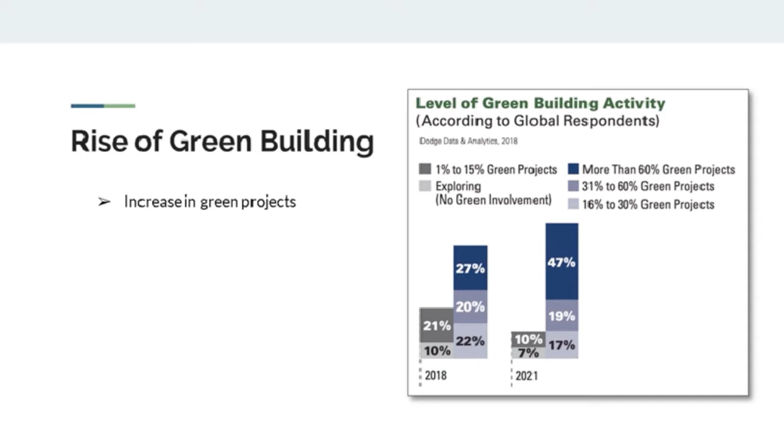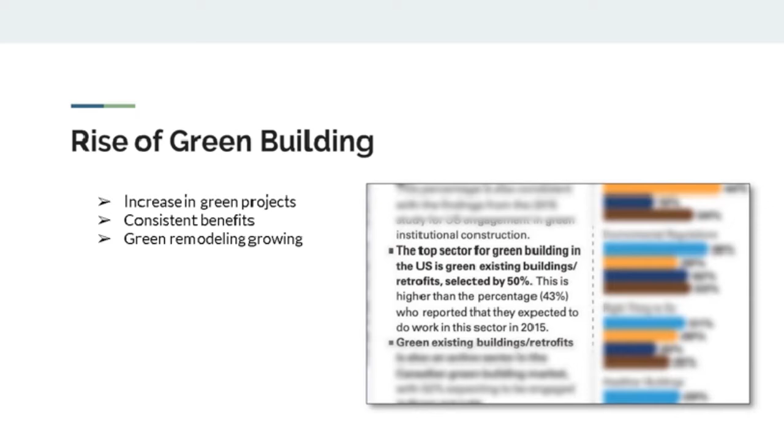The increase isn't totally surprising, considering the reported ROI on those same projects, including retrofits, which in 2018 increased asset value by an average of 5%. So let's say we're in Chicago, where the median home price is about $242,000, about $20,000 more than the national median. A green retrofit might increase that value upwards of about $12,000. And in fact, green retrofits and projects on existing buildings are the top sector for green building in North America.

And I talk about green and sustainable building not only because companies are doing it, but because what's driving this trend is homeowners, both in the U.S. and in Canada. Client demand in this study was the top trigger for green building. So it's not only good for the environment, it's something that people actually want. So you're not just doing it for the sake of making a statement.

Now, I bring this up because a lot of companies are working this innovation, sustainability, and efficiency into their businesses. And I wanted to talk to you three, Josh Anderson, Josh Moser, and Phil Keene, about how you're working it into your businesses before we get into the specifics of the New American Remodel. So Josh Anderson, if you want to kick us off, tell us a little bit about how Element works these fundamentals into your business.

I think for us, this is something that we decided years ago that it was who we are. And so for us, this is kind of one of the core tenets of who we are as a design-build firm and as a contractor, that we really want to be building and working on projects where we're creating the very best product that we can. And for us, before it became as mainstream as it's becoming, high performance and designing for high efficiency was a core value of ours. And so that's just part of what we do.

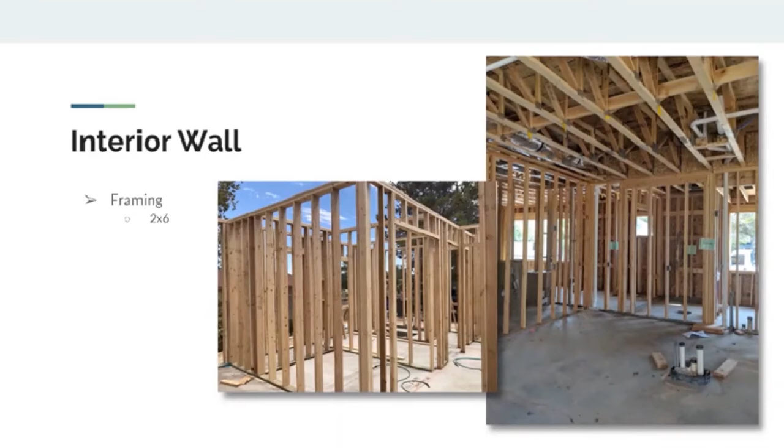So what's actually built is a 2x6 wood frame exterior wall. We have 2 inches of rigid foam, and then open cell spray foam. And part of learning what performs has a lot to do with your individual climate and where you're building around the country. But for us in the desert, the exterior rigid foam has a huge impact.

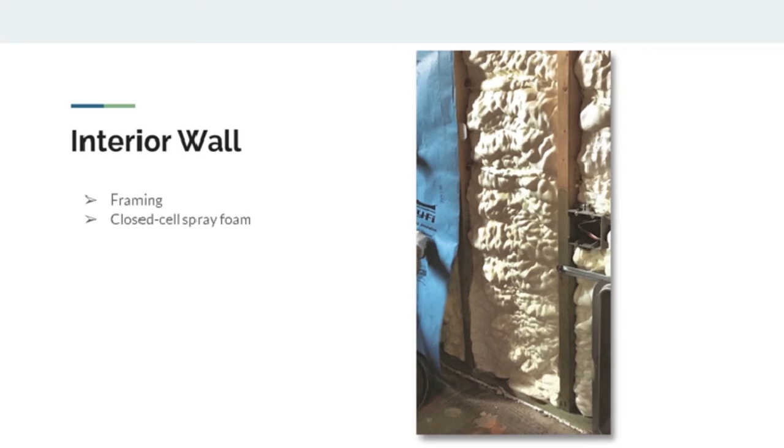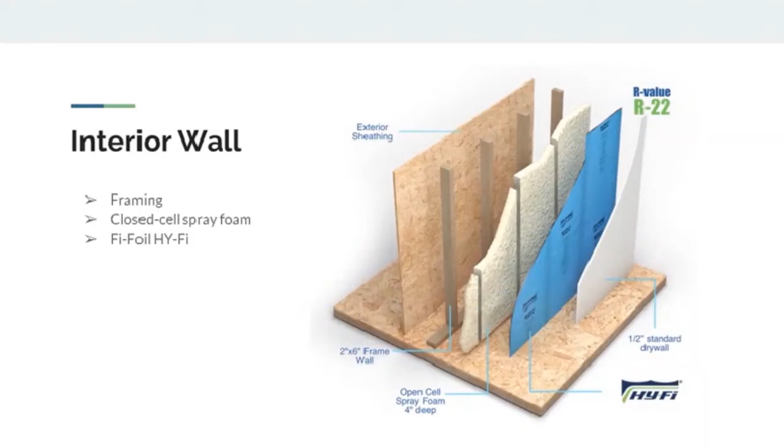It prevents thermal bridging. So if you were to take thermal imaging of a wall that did not have rigid foam on the exterior, you're going to see heat transfer occurring at every one of your vertical frame members. And when you take a thermal image of that exact same wall, but with rigid foam on the exterior, it prevents the thermal bridging, so you don't have the heat gain that you get going through the frame members.

For us, that's become probably our standard wall assembly, or our default. And so we end up with a great insulation value. The spray foam does a great job in terms of sealing off any of our air penetrations. And we'll do some form of sill plate seal, and then the rigid foam on the exterior, spray foam on the interior.

I actually can't remember offhand what our air exchange on this home was, but on our homes, we're consistently below 1.6, 1.5 on our air exchanges, and typically that's on homes that are 10,000 square feet and larger, which is phenomenal if you've tested any homes. So for us, this is a very, very effective system in terms of building envelope.

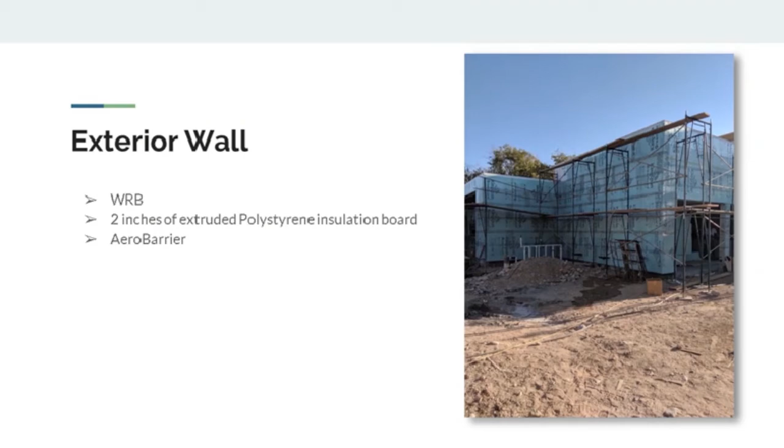So the air changes per hour for this year's house, I believe the final test was about 1.54, which is very impressive. Last year's was 2.5, which even 2.5 isn't a bad number. It was an impressively efficient house last year. And we spoke with Drew Smith, who a lot of our listeners will know from Two Trails. He's also done a lot of efficiency consulting on all the houses. He was discussing that even a decade ago, houses were getting in the 4s and the 5s. So it's pretty impressive to see what you guys are able to accomplish.

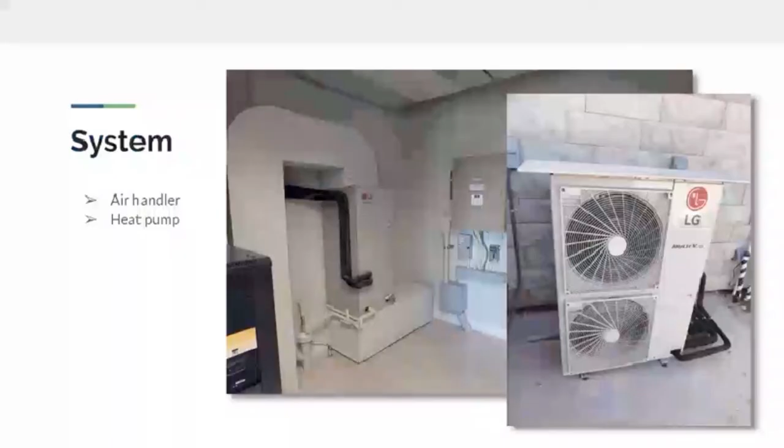And he also mentioned the AeroBarrier was a big help in terms of getting that in. So you sort of reiterated what you were saying, Josh. The next thing I want to talk about in the home, where you're able to gain a lot of efficiency, is the HVAC system. Josh Anderson, it was kind of a complicated system that this year's house used. Why don't you walk us through it, starting with the heat pumps and the air handler.

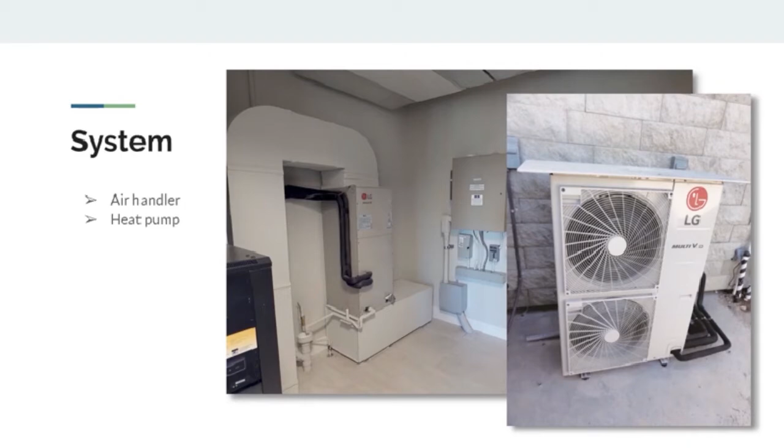So this year's home, we used LG mini splits. So we have ducted mini splits throughout the house. We were trying to showcase all of their products. So in one of the rooms, it's a wall hung unit that looks like a piece of art. We have ducted mini splits, and then just some mini splits.

For us, we love this system because it's incredibly efficient in that you are only heating or cooling the spaces that you're using, and you have the flexibility to really, truly set the comfort level in each space within your home. So they're extremely efficient in and of themselves, but then on top of that, the added efficiency of individual space control means that you're not heating and cooling the spaces that you're not spending time in.

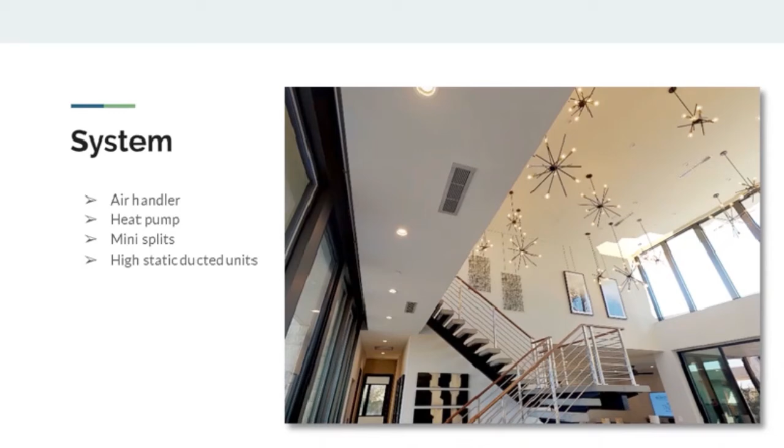And then the heat pumps, because of our solar array, we're generating enough power to offset basically the consumption of the whole home. And so from that standpoint, heat pumps are good as well. And we're in the desert, so we don't have the frigid cold temperatures that some parts of the country have.

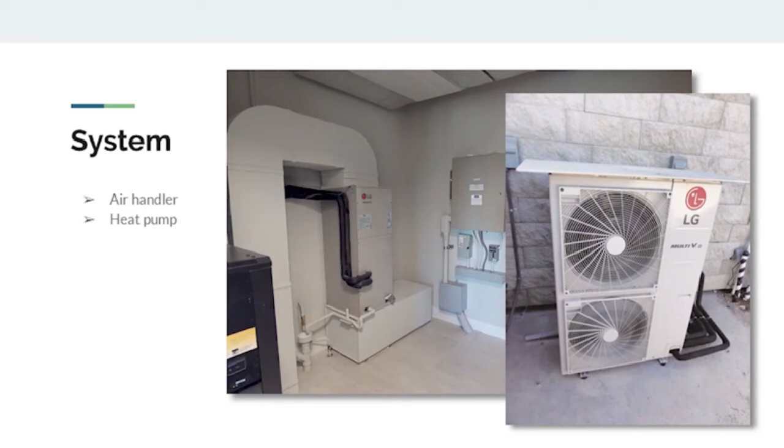So, were there any challenges in installing this HVAC system? Yeah. So as anyone who has done modern architecture, modern construction can attest to, the challenge is always getting all of your rough-in into the lid cavities that are typically reduced in this style of architecture, and so this was no different. We had some challenges in the secondary bedrooms.

The cassette and return airs are rather large, and getting those into the lid took a little creativity on all of the team's part, but it turned out beautifully, and we're thrilled because of the efficiency of the system and what that does for us in terms of our performance and comfort of the home.

Question for Josh Moser. Obviously, in this home, you had LG's sort of decorated mini split system that serves as basically a piece of art while also working as a mini split. But not all mini splits have such a nice little design component to them. Mostly they're functional. What are some of the challenges in terms of fitting those into a room, and how do you usually, because I'm assuming you install mini splits on other projects, work mini splits into a room without them looking too obvious?

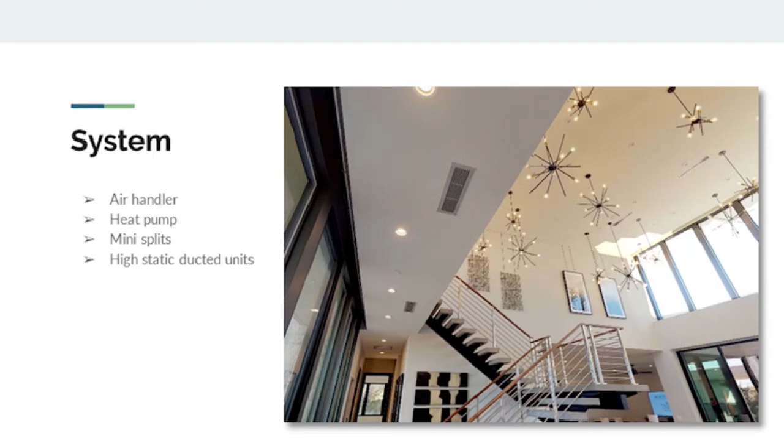Well, generally trying to make them as invisible as possible is usually the goal, but it was nice to be able to have exposure to LG's new system that is definitely more aesthetically pleasing, and to have the flexibility of being able to put whatever kind of portrait or picture you would like in that system. I love the flexibility of it.

I learned shortly after we had installed it, because the system does kind of protrude out of the wall quite a bit, because it is an HVAC system, that it is possible to actually semi-recess this system, kind of like how you do a recessed TV. You can actually build out a recess for this to sit more into the wall, as long as it has, I think they said, a 6-inch clearance around it. So that was my only holdup with the system. Otherwise, it is a great solution for this kind of application.

Excellent. Moving on to another part of the home that obviously has a lot to boast about is the energy portion. Now, it's my understanding that the house generally has a pretty normal energy setup, apart from something that Josh Anderson mentioned earlier, which is the solar array that sits on the top of the roof. Josh Anderson, you want to tell us a little bit about that array and the efficiency it brings and what the challenges of installing it and working around it are?

As far as the efficiency goes, it's an efficient system. The thing I love most about it is it's backed up by LG. So a lot of your solar manufacturers and panels, and this is particularly true going back a few years ago, are for the most part companies that don't necessarily have a market presence, where your clients know who the company is. And so from that standpoint, LG's got great brand recognition.

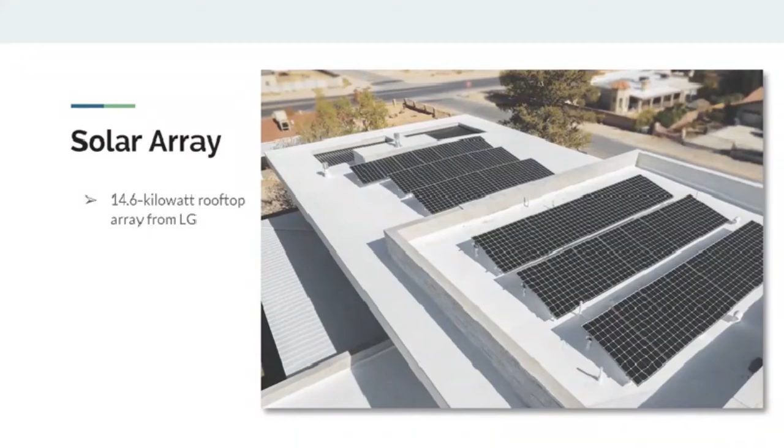And I was made aware that the solar array helped a lot in bringing down the home's HERS score. It's my understanding that without the array, I think the HERS score would have been something around 47, and then with it, brought it all the way down to -17. That's correct, right? Yeah, I believe those are the numbers.

And the HERS rating without solar, if you look at the amount of glazing in the home, it's a very, very well built home. And then of course solar is always the thing that kind of puts us over the top as far as the efficiency and HERS ratings are concerned. So in this instance, we're putting power on the grid.

It's my understanding that for net zero and having a solar array, for all of that to be affordable, it needs to be cost effective, which ends up factoring into the size of the panels, because you want the smallest, most efficient that you can without spending too much money. For determining the size of these panels, is that a calculation that you make, or how is that made before these are purchased?

We do that, or on this particular home, we do that in conjunction with Two Trails, with Drew Smith. He's our energy consultant on this home and actually our energy consultant on most of our homes. The team's fantastic to work with. So for those who are thinking about it or don't really know how to get into it, that's what I would recommend. Start with Two Trails, and they will show you the way.

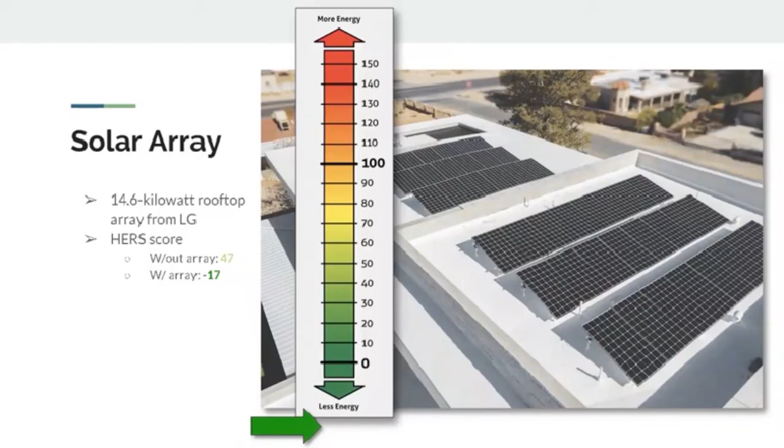And once you've gone through it a couple of times, it just kind of becomes part of what you do. So those calculations are based off of the load calcs, which are the electrical demand of the house, based on your actual systems within the home and the power that you're going to consume, and then your system is designed and sized appropriately based upon that.

The final leg of our webinar is going to be focused more on the innovation side rather than sustainability, and it's home automation and smart tech, which this year's home is completely rife with. A lot of the products are controlled via a central app made by Savant, who installed a lot of the speakers and stuff like that throughout the house. But there's also a lot of other technologies, toilets, mirrors, thermostats, that demonstrate this new trend, new meaning the last few years, of home automation and smart technology.

Josh Moser, maybe you're the best person to speak about this at first. I want to know, what's the sense from you about how important home automation is becoming, whether it's a fad that may become standard, or whether it's already become standardized?

It's definitely catching fire, if not already. Most clients, I would say all clients, want automated systems in their homes. I think just everything is going that direction. Every company and industry is trying to make it easier for people to access everything in their home via their phone or some form of automation. So definitely, I would say yes, that is the standard now, and definitely having that in mind through the design process. There's definitely ramifications and design implications that need to be accounted for when doing these automated systems.